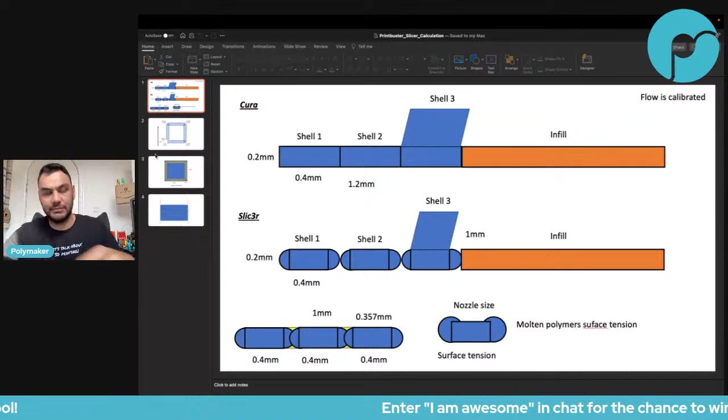Purple and chill combo looks way too good together, so all the printer mods are getting printed in this color combo. Yeah, it's pretty good. Dark and light is the most beautiful - dark for the main color, light for the accent. That combo cannot go wrong.

Okay, let's get into that again. We do have some more information coming from our Discord. I think NSCHO, FDAF Patch, and Zombie, if I remember well, are the names I've seen really trying to understand a bit deeper on flow calibration.

Where is the cotton candy filament? Like I said last time, I believe our pastel color in the Polyterra is pretty cotton candy. Otherwise, you see all my cute dragons here? Can you see them well? I printed them - it takes 2 hours to print one, but look how beautiful they are.

Look at that, look at these colors. They're so beautiful. Aren't they cute? Beautiful green. This is our light blue. This is our teal. It's just so beautiful.

We have the Sislov red that is printing. Maybe we're gonna call it Brit red - then we won't have an issue with the Sis Lord.

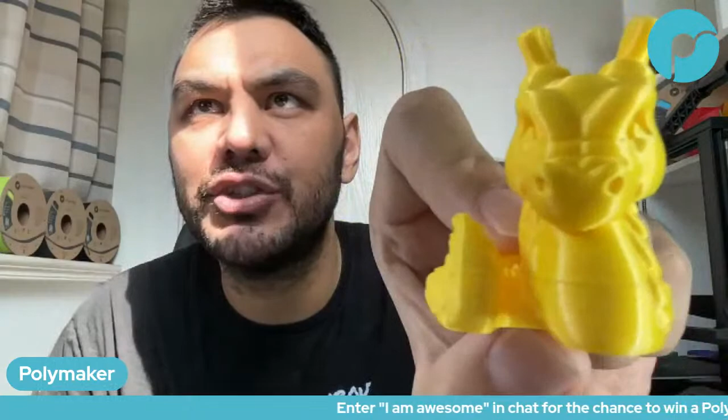So there is a line that we can try to discuss - why there is a line after power recovery. Give me your hypothesis: why, if you have power recovery and you're following exactly the same G-code, would you have a line that goes all the way? It seems it's not even a layer shift, right? It's really, for some reason, 2 layers that extruded more than the others.

But anyway, my favorite color is, of course, the teal. We're finally gonna have a Polymaker Silk teal. Of course the light blue is not far behind, and the green - well, I love all of them. Let me put them back. We're gonna have around 20 silk colors. They're so beautiful.

When the red finishes I'll show you - it's also beautiful. Please take a screenshot and show that to Sislov Brit, because I'm gonna call that red, most likely, Brit red. I unfortunately can't use the Sis Lord name, but it's printing right now and I'll show you, and then we'll print the orange. It should be finished in an hour or so, so during the stream it will finish.

I explained that months ago. Oh really, FDAF Patch? You mean why the power recovery leaves that line? Brit red, exactly - I think there's 2 T's if I remember well, I have to check the spelling of Brit.

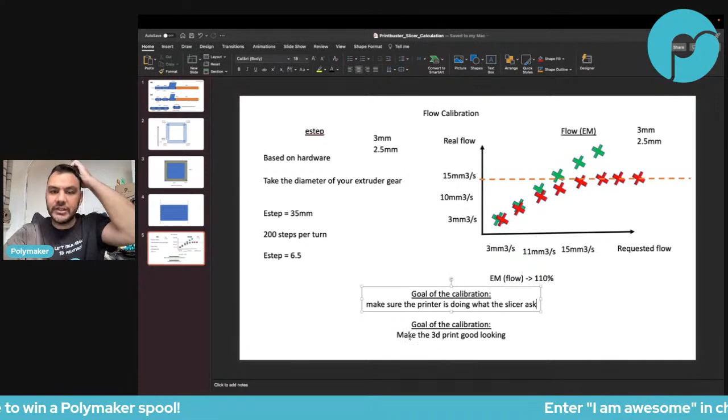That's the goal of this calibration. There's another goal of calibration we can discuss later, which is making the 3D print good looking - that's a different type of calibration. The calibration I'm talking about here is making sure the printer is doing what the slicer asks. If the slicer asks for this amount to be extruded, you have to extrude that amount - not over extrude, not under extrude. The other goal, making the print look good, is different - you print some parts and make sure they look good, whatever the extrusion amount, we don't care.

So let's start the feedback. Let me know what you think about this calibration. Is this the perfect calibration? Is this how we should always calibrate the printer? I've seen a lot of different kinds of calibration, but I want to find the one that does this the best.

FDAF patch - it's true, retraction doesn't take into account extrusion multiplier or the flow. I just tested it. Thank you, FDAF patch. Then we don't have to test that.

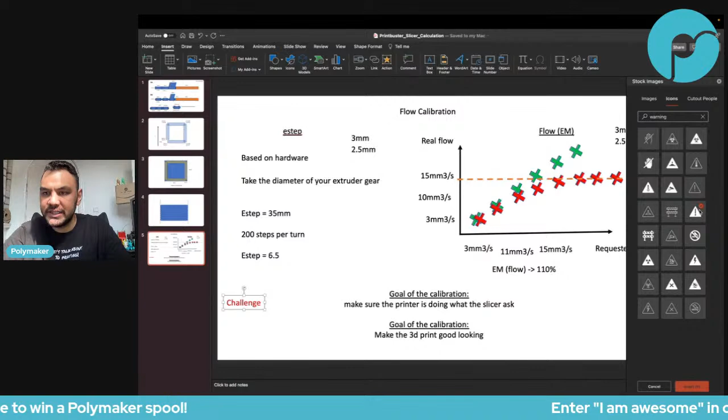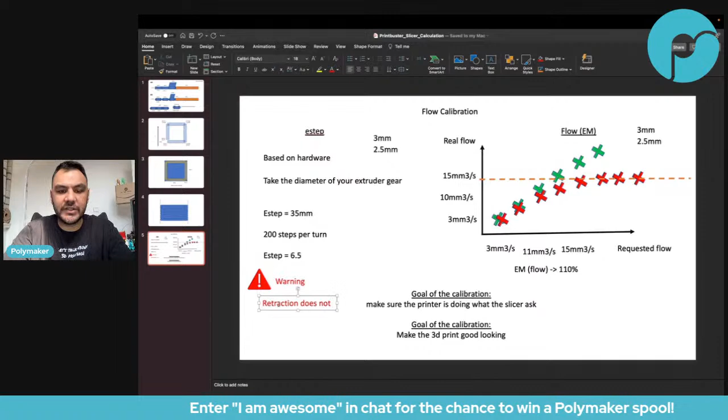So there's a challenge here we need to take into consideration, or maybe a warning. Let's put a small warning sign here - warning, and I don't know if there's other stuff that's not taking the extrusion multiplier into consideration, but retraction does not take extrusion multiplier into consideration. That's important information, because if it doesn't, it means the printer is not going to do what the slicer asks.

Let me stop talking a little bit - oh, Zombie, let me know. Zombie wants to come in. Let's invite Zombie, what does he want to say? Let's welcome Zombie - I like how Zombie just says hey, let me in, let me talk a little bit, let me get some stuff clarified. Where are you going like this - you miss this, you miss this, you miss this. Let's see what Zombie has to say. Okay Zombie, I just sent you the link on Discord. Be prepared, I'm going to be scolded by Zombie.

Doesn't work if you have minimum layer time, as this will reduce the flow for small layers. Yeah, exactly. Actually, we should put a warning here: the slicer does not optimize extrusion multiplier per flow rate, because theoretically each flow rate should have its own extrusion multiplier, but the slicer only has one extrusion multiplier for everything. So that's the second warning - that's a good point.

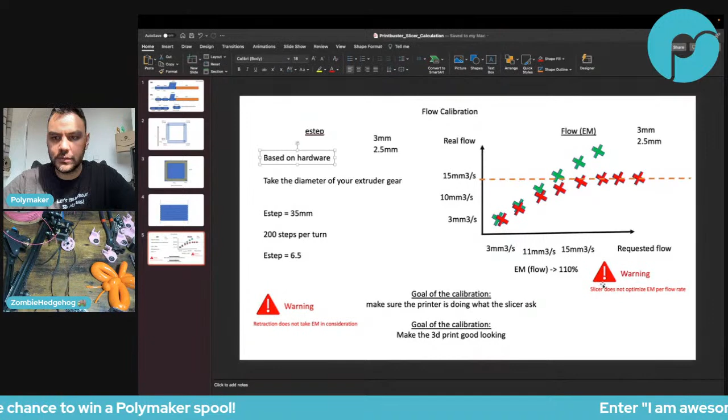So I have to do more tests on this, and I'm going to start doing them live to see if maybe changing the setup would affect something. I don't know. But what was the extruder on that one? This is the Ender 3 Pro, so this is the stock Creality extruder.

Why adjust tension when it's set? Okay, let me put a small star here. So Little John, you shouldn't need to adjust the tension, but the idea is that we have to test how much the flow is affected by changing the tension.

Why adjust the tension once it's set? Is this an Ender thing? Not really. I think you can have a set tension, but what Zombie is saying is the tension will be part of the factor when you adjust the flow. For me, the e-step is only based on the gear diameter. One warning though - unfortunately if you do that, the retraction won't really follow what the slicer is doing, and then you'll have to compensate all other factors with the flow.

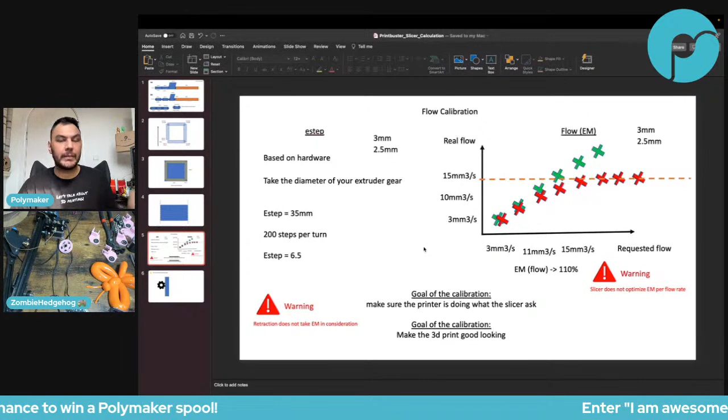Okay, so my theory is that if you calibrate for one filament, the end result, the end flow, is going to be similar enough between different filaments that you might not notice in the final result. Because the difference when you do a test for, let's say, 100% to 90% flow for the surface layer, there's not a lot of difference, so you might not notice if it's over-extruding or under-extruding as much.

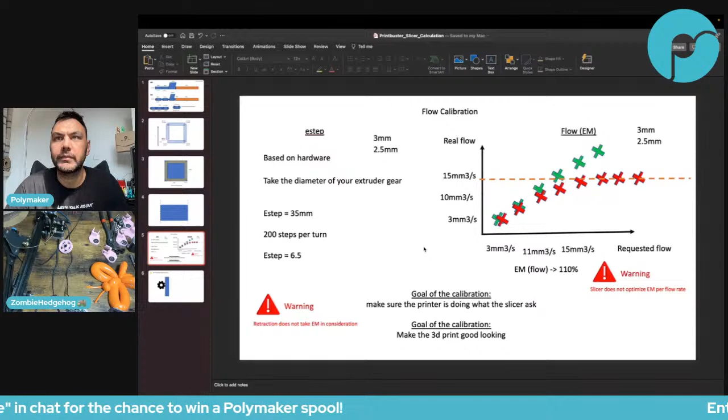So you're saying they use the filament because anyway there's not much difference between different filaments? That's my theory—there probably is a difference, and that's what I want to test, to see if my theory is correct. I'm trying to replicate my results, essentially, to see if it was a setup issue.

Yeah, this is interesting. But so, why is it different today? The E-step calibration this way is much easier to do, right? You just have to take the diameter of your gear. Why would they make it more complicated? What's the advantage of using the filament?

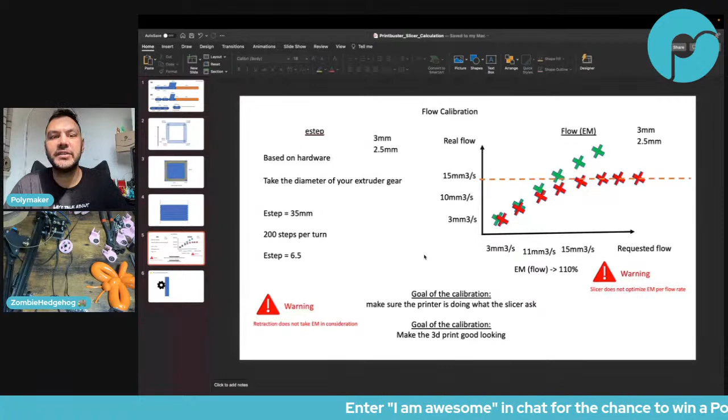Some are using with nozzle, some without, some are using retraction, some are priming, extruding one way or the other. What are the advantages of all of this compared to just adjusting the diameter?

Most people, from what I've heard, don't adjust their slicer settings. They use a stock profile, so they don't run any tests. They don't do anything. They just load the filament and print.

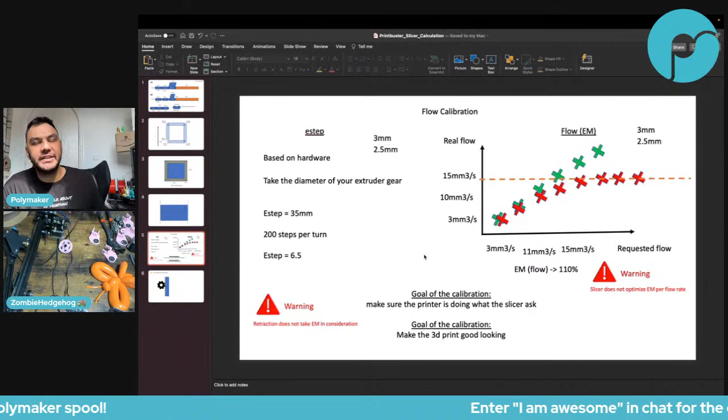So they don't change the slicer setting, but they would change the E-step. Yes, I guess, because everyone says to adjust E-steps, but no one goes through a proper process. There probably are guides for that, but the big one is: if the extrusion's wrong, adjust your E-steps.

The main thing I disagree with in E-step calibration is that most E-step calibration guides, whether video or written, do the calibration the same way they do flow. They put the filament in at the manufacturer temperature, calibrate your E-step, and then they want you to also change the flow. What I disagree with is if you go through all of this with the E-step, through the nozzle etc., then there's no point doing the flow calibration, right?

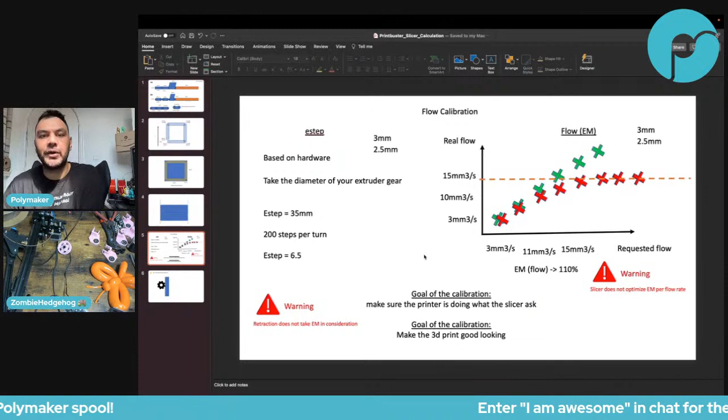Exactly, that was the beginning of these Printbusters discussions. Do you remember Nero saying that even if you do the E-step calibration this way, you still have to calibrate your flow for some reason, because of expansion or something? If you remember that topic.

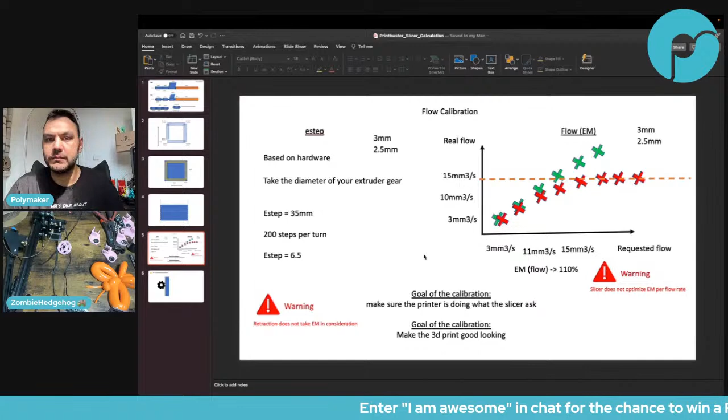Yeah, it'd be good to do a lot of testing, or try to find people who've already tested this stuff, and do internal testing with different setups. From the testing I did yesterday, which I want to retest and am doing now, I'm finding the results are similar. I might not be extruding long enough to see a difference, but I'll check my settings in a second.

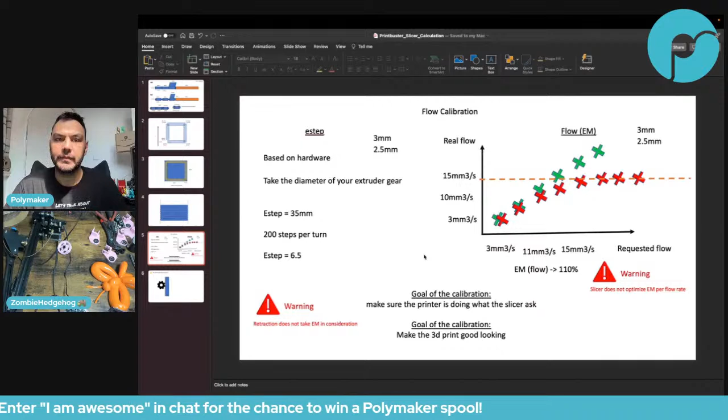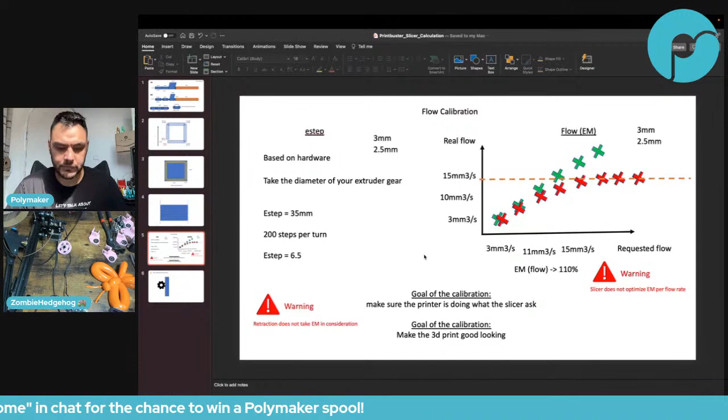Based on what I did yesterday, and chat kind of sanity checked me, even if there's a little difference in extrusion distance based on filament type or tensioning, that doesn't completely negate hardware E-steps calibration. So I think I need to check this, but I'm getting actually similar results.

Okay, no, that one was different. Good, I need to go longer then to amplify the results. But essentially, these are the two test pieces. This isn't crazy scientific, but of course there's a delay.

Let me go to StreamYards, or just the camera. So these are two tests, and this is the amount of filament left after extruding - this is the difference between just adjusting the tension, all other factors the same.

Okay, so the one where it left the most was the more tension one - more tension, more under extrusion. And that was kind of what we were finding yesterday.

Okay, let me read a little bit. How much are you extruding each time? For this test I'm only doing 150 millimeters. I should probably go further - I was doing, I think, like 250 yesterday.

CRS1, thank you for being awesome. Matt says: I think E-step matters to calibrate the printer to a set point. If I have multiple Ender 3 printers, I want them to have the same E-step calibration so my profile works the same on each printer. For material calibration, I adjust the flow setting.

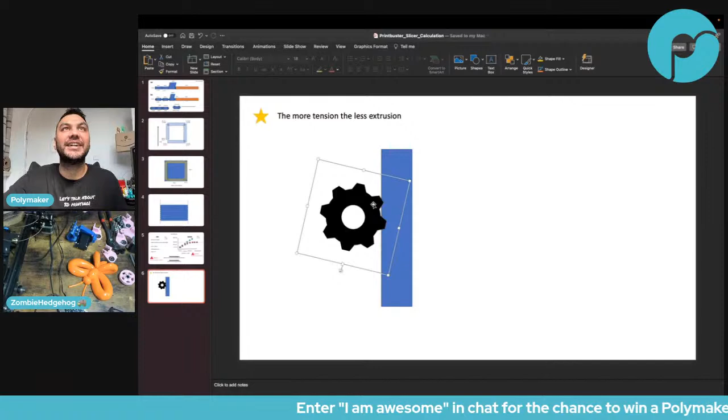Well, Twitch is bad, but at the same time, I have 90% of the people from Twitch and nobody from YouTube. So, just kidding, Gold. I mean, not kidding, that's the real numbers.

But I do agree with the YouTube chat or the Twitch chat. Did you post the Discord link in the YouTube chat or the Twitch chat? Both. Oh, okay. Otherwise I have to select, blah blah blah, so I just put it in. Oh, okay.

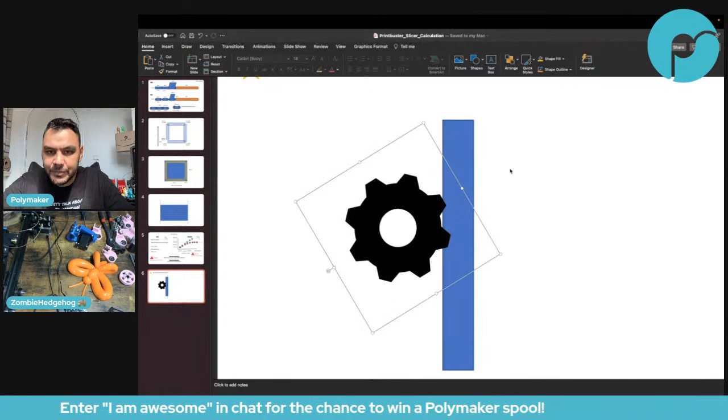Yeah, I do agree with the fact that the gear is going to dig into the filament, which is going to deform the filament. And if you have more tension, it's going to deform it a lot. From Zombie's test, this deformation is going to somehow reduce the amount of filament that's pushed in. It could come from the fact that when the gear is arriving and starting to dig in like this, maybe at the beginning it's going to create some force upward, and then it's going to dig so much, and then it's going to start to extrude. So maybe that could be an explanation.

But again, I only have this hypothesis because I already know the result at the end, so it's a bit biased. I'd have to think more about how to explain that the more tension, the less extrusion. But again, I don't believe that as you're digging in more, you reduce what you call the effective diameter, and so the calculation is different - I don't believe in that, because of the tip of the filament, because the gear is going to go the same speed anyway, and the tip of the gear is the same. If it would be the whole gear that somehow shrinks, then yes, you'd have to redo that gear ratio calculation. But digging into the filament, I think there's some other physics happening, not that calculation.

The effective diameter is called diametral pitch, and we found that the closest match to what all manufacturers set as the stock E-step is the diametral pitch, not the outer diameter. Sorry, I don't know what diametral pitch is, let me check. Diametral pitch is the ratio of the number of teeth to the pitch diameter. Face width is the length of the teeth in an axial plane. Oh, okay, cool, we're getting the same results.

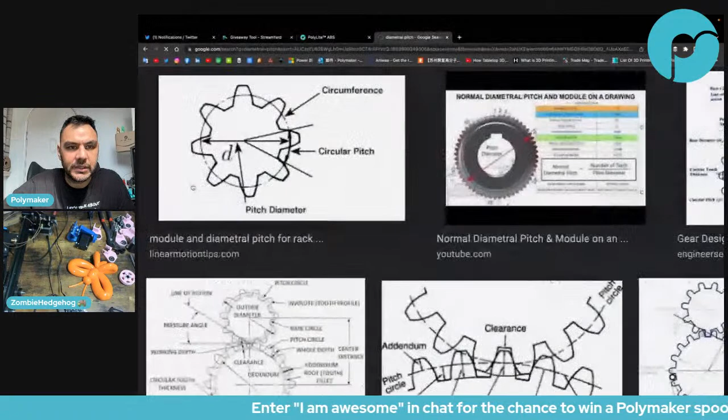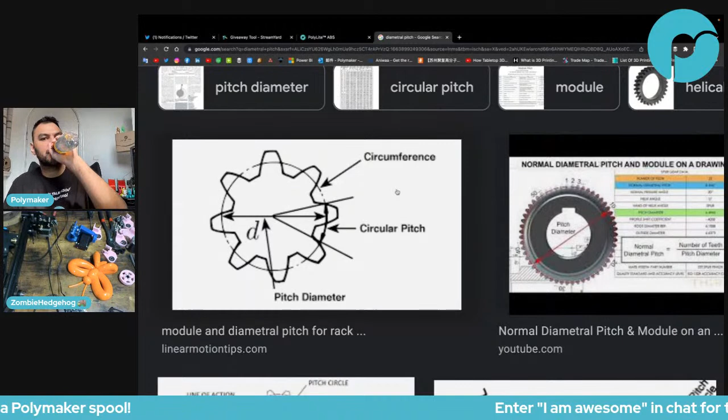Good, I want to test the other filament again. So if you think about how gears work, this is probably the easiest way of explaining it: if they're meshed together really tight, there's a different gear ratio than if they're spread apart but still making contact. I think that principle still applies to the gear driving the filament - the further away the gear is, the more or less contact it's making with the filament, right? Does that make sense? Is that right?

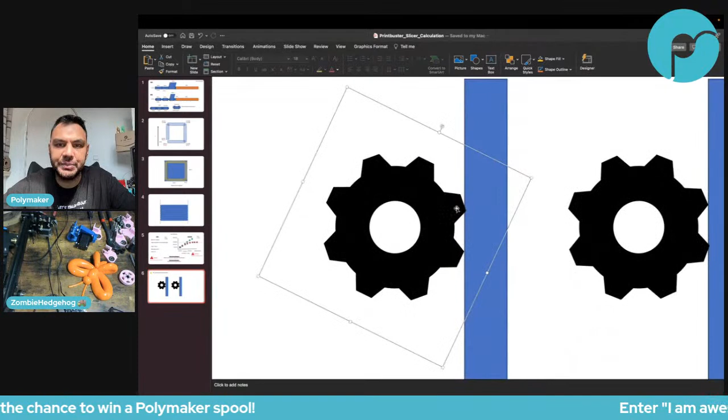Okay, so what we need to explain is, for example, this one is further away, right? Is that right? And then this is going to have a certain speed, like the tip of the filament - well, it's not the tip. The speed is not defined by the tip of the filament, it's the tip of the gear. Or no, yeah, I don't know, I have to think about that for a second.

Because there is a way to explain it. The part I'm trying to understand is why this part of the filament here should theoretically go at a certain speed, right? So it's not. I don't know, and then there will be a distribution here. So is that because of that distribution you have to take an average?

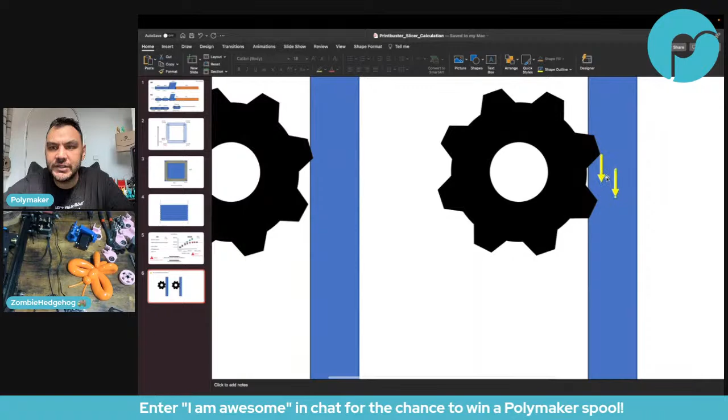So the filament will deform anyway. You see, like here, the filament is just being squished in. I think the actual filament is being compressed. There's no additional speed variation.

Well, actually, that's something to talk about, but I don't know. The more I think about it, the more factors come up, and the more other things make sense. So I'm trying to make sense of it.

So we know that the effective gear ratio is reduced as there's more tension and more digging in. So can someone explain why that's the case? Maybe with an example. And actually my gear is not really representative, right?

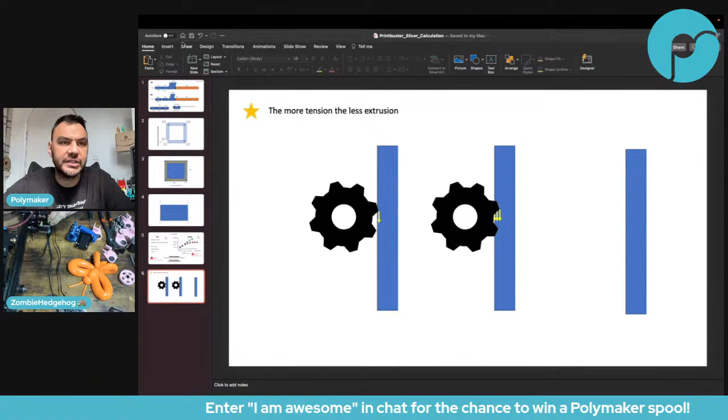The gears in printers are way sharper. So yeah, it's close enough, same concepts, right? But it enhanced the issue. Because if you really dig into that, then you really have the tip here that is pushing much faster than the rest.

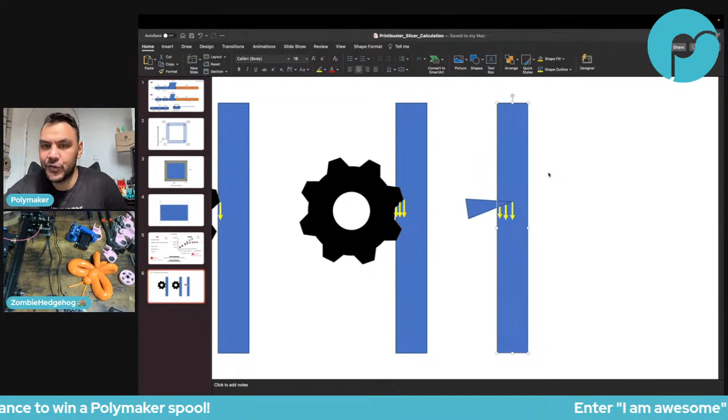So yeah, I'm not too sure what's happening after you dig into that, because definitely when you have a solid that has different amounts of speed within it, that's what Newton's first law, I think, says about the amount of force. But the filament is not staying solid, right? It's deforming, and for me the deformation is what creates this issue.

It's doing something there. This is what Josef was talking about in the 3D Printing Nerd video, where they discussed the XL some time ago. Oh really? They went into that? That'd be good.

Joseph, let's get into that. Did they explain it or did they just say some stuff? 3D Printing Nerd, XL, Prusa. Oh yeah.

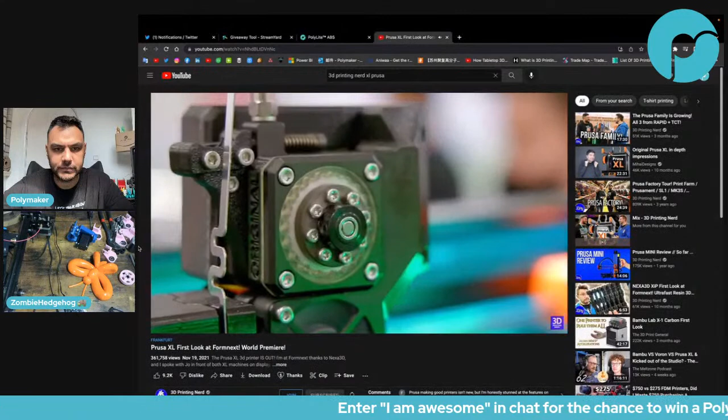Hey, it's Joel. What's behind me here is really cool. We're going to a brand new extruder. Yes, 20-to-1 gear ratio, cycloidal drive, right? Cycloidal. So we really wanted to have a fully integrated extruder. What is this extruder? I've never seen it. That's so cool. See it here on the look. The extruder here, I've never seen it. I didn't know. I know. What is that? I don't know. Cycloidal, like something extruder, glass display. Oh, that's cool. Yeah, and so there is one central milled aluminum.

So is that the video, Little John? That looks about right. Oh, but it sounds like he's abandoned that idea. Okay. Which, they went to planetary. Yeah, a bit later, okay. Let me go a bit later.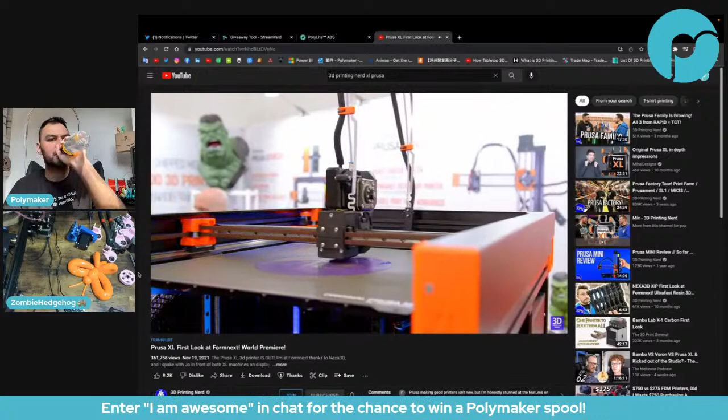The reason for it is to have more surface area touching the filament. Yeah, but you don't have to have two, you can have one large one. And what is nice, when you have larger diameter, for example, on the Bondtech, the filament gets a little bit chewed because on the inside, it moves slower than on the outside in the groove. Oh, I see, so this eliminates that.

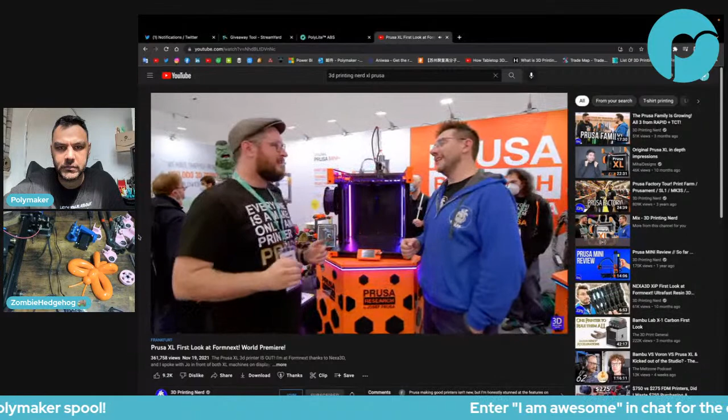Yeah, let's listen to that again. Gets a little bit chewed because on the inside, it moves slower than on the outside in the groove. Oh, I see, so this eliminates that. Yeah, so it is much more consistent. Sometimes they didn't go too much into detail, but let's try to listen to that again. On the Bondtech, the filament gets a little bit chewed because in, okay. A really big one. And you have two of the bearings that you push against, right?

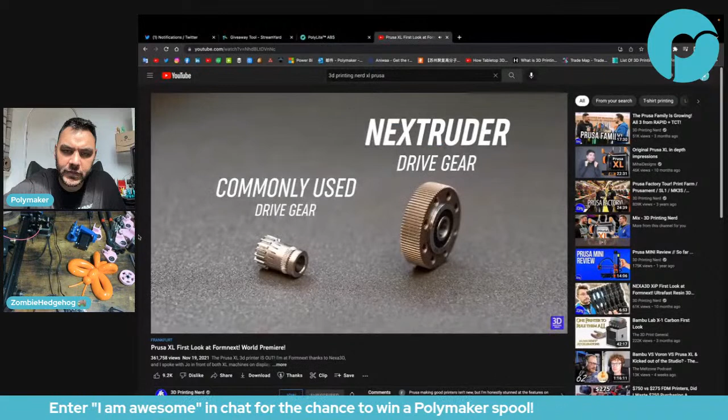Yes. So FDIP Hatch says this happens because filament is ductile and is being displaced by the tooth into the holes between each one, making it act like a wheel that can change the diameter by a little bit. Yeah, that's what I was trying to think of.

Let me try to draw up something on Paint. I don't use the good PowerPoint software. The tooth goes into the hole between each one, making it act like a wheel that can change diameter by a little bit.

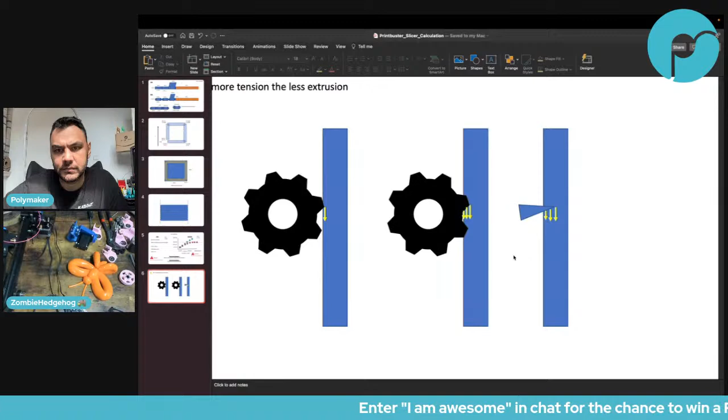So this is the same theory as the extruder lines you get on prints. The fact that the extruder digs into the filament a little changes the speed, and that speed is reflected in different amounts of extrusion, which you can see on the actual print. So if you have too much tension, the teeth dig into the filament and change it as it's going. But I'm not 100% sure on the mechanics of that.

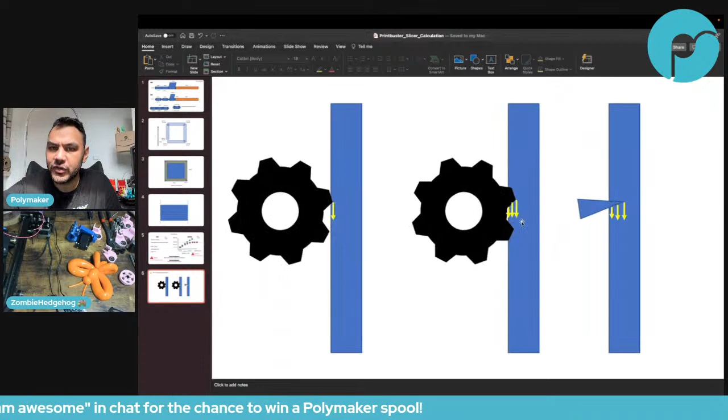I don't know why. I still didn't get it so much, why digging into the filament is going to lower the speed or extrude less. The only thing I can see is that when the gear is about to dig, from that point to that point it's actually pushing filament out of the way, or something like this. I don't know.

I have a clog. I have a clogged tube. I have a clogged nozzle. It is what I said for a couple of minutes. What did you say?

Dual drive gear. Sorry, let me just listen to that one more time because I still didn't understand what he said. Of the bearings that you push against, right? Yes, basically dual drive gear. The reason for it is to have more surface area touching the filament.

But you don't have to have two, you can have one large one. And what's nice with a larger diameter, for example on the Bondtech, is that the filament gets a little chewed because on the inside it moves slower than on the outside in the groove. Oh I see, so this eliminates that.

So I don't think he explained it, but I have something in my mind which I think is what he meant. He's talking about a larger gear solving that problem. Here's my hypothesis. When you have a small gear, let me put that out of the way. So let's say this is the small gear.

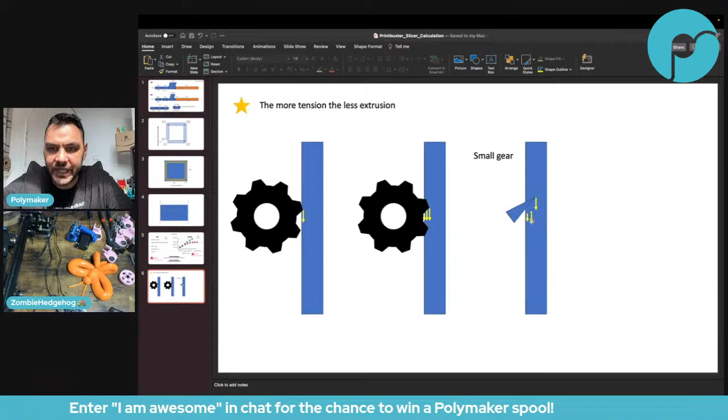Here's a thing, very logical in my mind, let me share with you. So when you have a small gear, the angle of attack, if we can call it that, is going to be very sharp. And there's going to be a large difference between the tip of the gear and the bottom of the gear, okay?

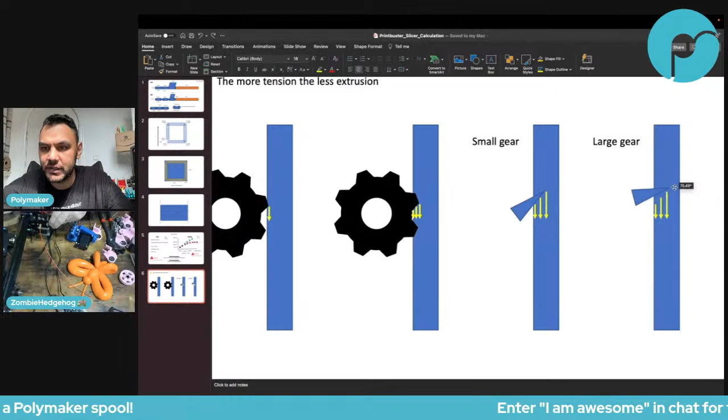But that, I still don't know why, creates some problem — the fact that you completely deform the filament. But if you have a large gear, the angle of attack is much less. It's able to get more grip on the filament by making more surface area contact with it, versus a smaller area needing more grip.

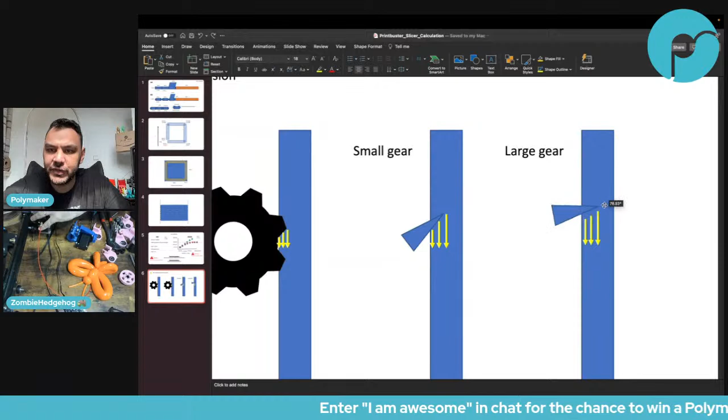That's why I think large gear extruders are the way to go. They're definitely optimal, this kind of explains that. So you should hypothetically get fewer artifacts on your prints via large gear extruders. Well, let me think. So the angle of attack is going to be more like this. Yeah, so it's going to deform less, more evenly push the filament with a large gear, because it's going to arrive like this.

Well, we know that already, that's already a fact. What we're trying to figure out is we know the result, but I don't think we know the explanation. We don't know why large gears are better than small gears. Because the teeth dig in less. Yeah, but then we don't know why digging less is better. So that's the main question: why does the flow vary by the teeth digging in more?

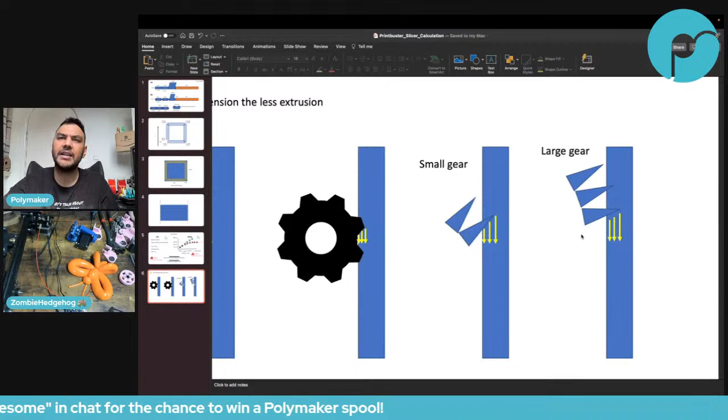I don't think it's about digging less. I don't think the large gear is better because it digs less, that's not what I'm saying. What I'm saying is the angle of attack is different. So you have less of a difference between the tip of the gear and the middle of the gear compared to the angle of attack of a small gear.

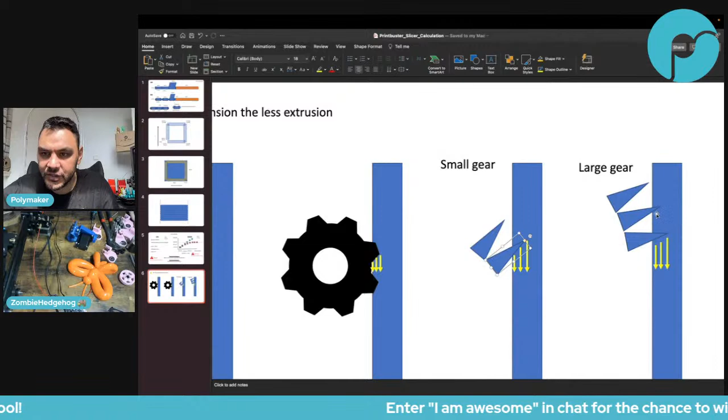So yeah, it's a bit hard.

Just bought a roll of Silk Silver and Silk Magenta on Amazon before the Lightning sale ended. Excited to try them. Yeah, great, Jared, great that you were able to take advantage of the deal.

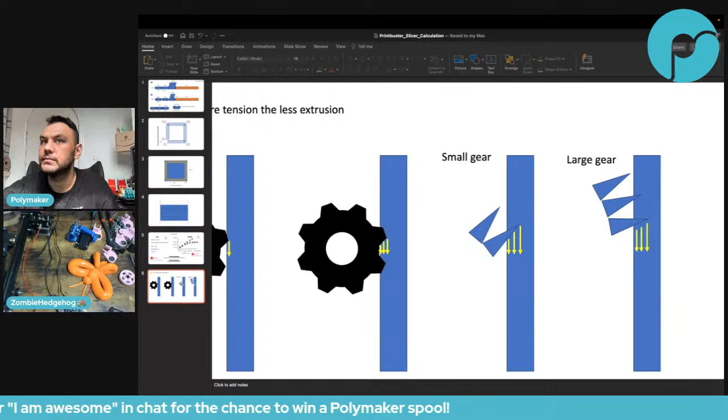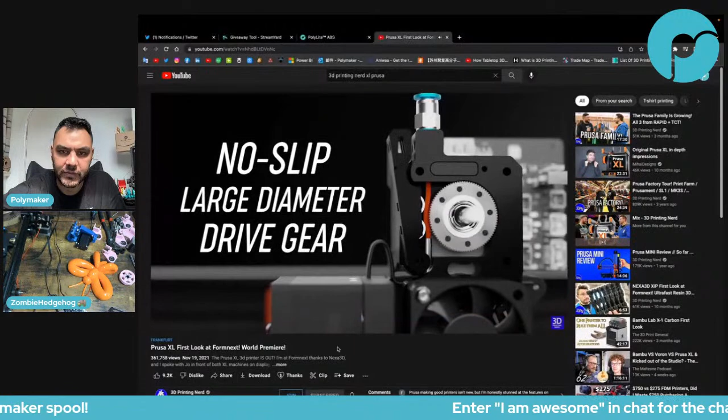Because that's what he's saying. What he's saying in the video is that larger gear... well, let's listen to that again. We have to listen because he's going very quick. Two of the bearings that you push against, right? Yes, basically a dual drive gear.

The reason for it is to have more surface area touching the filament. But you don't have to have two, you can have one large one. And what's nice, when you have a larger diameter, for example on the Bondtech, is that now he's going to explain why it's better to have a larger diameter.

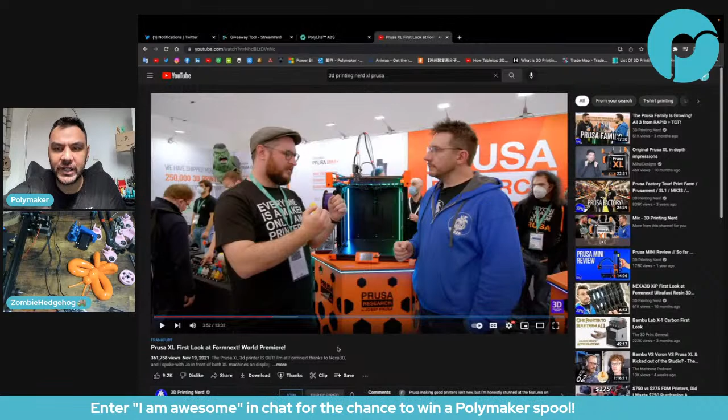The filament gets a little bit chewed because on the inside it moves slower than on the outside. Okay, so inside it moves slower than the outside - that's what we explain here, right? The inside here, the filament is being pushed slower than the outside here, in the groove. Oh, I see.

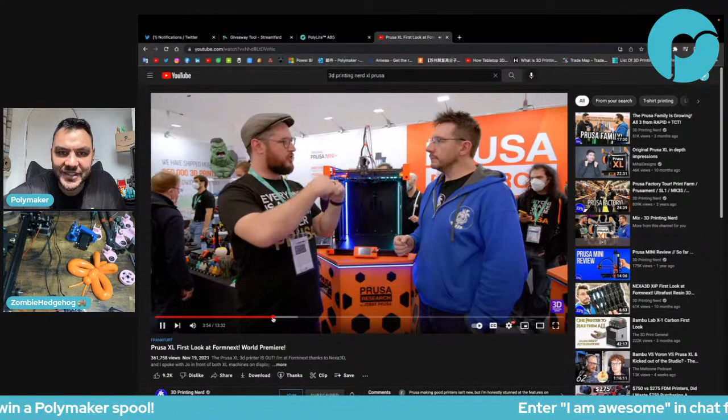But the problem is, I don't know how Joel understood just with this - a little bit chewed because on the inside it moves slower than on the outside in the groove. Oh, I see, so this eliminates that. Yeah, I don't know, eliminate... I don't understand, but anyway, I guess that's what Little John was referring to.

Bigger gears mean less speed difference between the tip and bottom of it. It also has more teeth in contact at the same time, so it digs in less, like a bed of nails effect. This one I agree with - I agree with the first one and I agree with the second one. What I'm saying is it's better just because of the first one, because digging less... well, digging less means less speed difference also. Yeah, that makes sense. I 100% agree with that.

Ask Joel about it - yeah, I mean Joel is more focused on general presentation for the public about printers. I'm not sure he's particularly interested in that amount of detail. Joel's not the person to ask for this. You'd want one of the manufacturers of printers, or a hardware person, or someone who does a lot of testing - but not just anyone, because they'd have had to test this particular thing. So honestly, go ask Bondtech if they're going to be there, go ask an actual manufacturer of extruders.

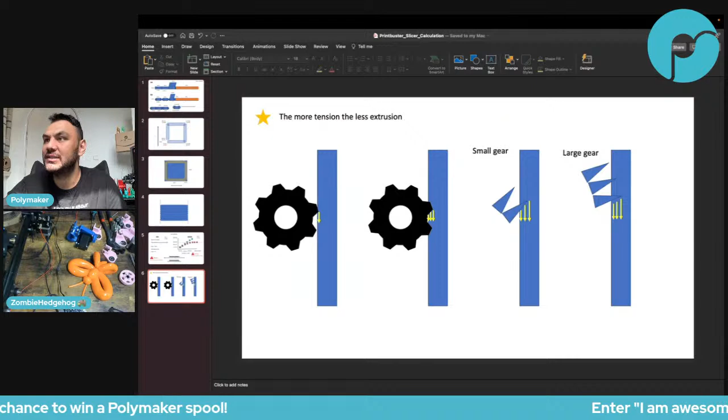Some finite element analysis looking at filament deformation might be useful. Yeah, that would be awesome, Little John. That would be awesome if we could have this, it would explain everything so much easier. I don't know if any of you have access to this type of software and know how to set that up. Oh, I think I actually know someone. That would be awesome if we can do that - that would be a great white paper right there.

Here's the actual question, and now that I'm looking at this a little more I'm starting to see. I'm guessing that the speed of the filament is dependent on - we'll go back to that, go back to the image. Oh sorry, I need to restart my print at the same time. What was that? Okay yeah, you have it back up. So I'm thinking that the edge of the filament versus the speed or contact of the gear, that's what defines the print speed.

So as the filament gear digs more and more in, it becomes slower, the extrusion becomes slower. Does that make sense? Yeah, because it will start to have internal stress of having the tip of the gear very far, pushing the filament fast, and the more you dig in, the more you'll have part of the material pushed slower, and it will start to create stress, lowering the overall speed. Yeah, that makes a lot of sense. You take the average. Come again?

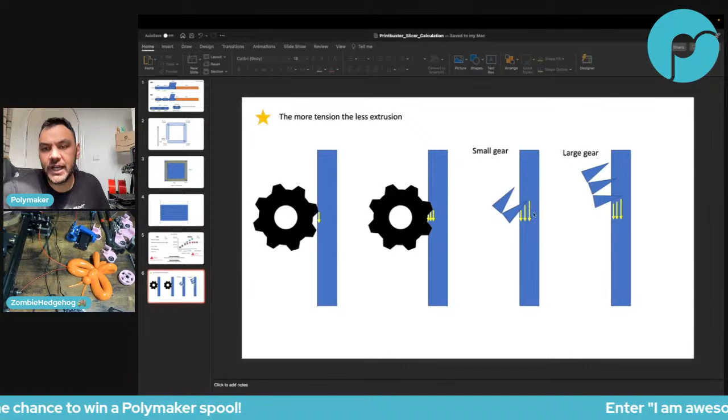But there has to be some stress, right? Because otherwise... well, yeah, okay, there's stress, but how does that work? What causes what? Oh man.

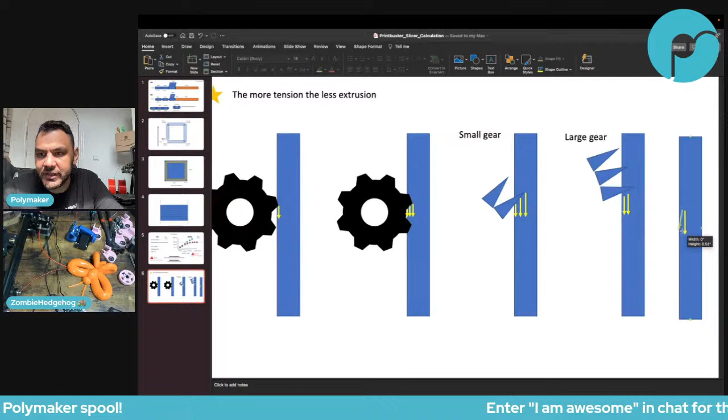Basically it's like this: you have the filament here, and if you only have the tip of the gear that digs in, then you only have a small amount of set speed. So you do an average between two speeds. I don't know exactly how the filament will react, but maybe we can just take an average of this speed, and that would give the average speed of the filament. The more you dig in, the slower the speed gets, like the effective diameter they were talking about.

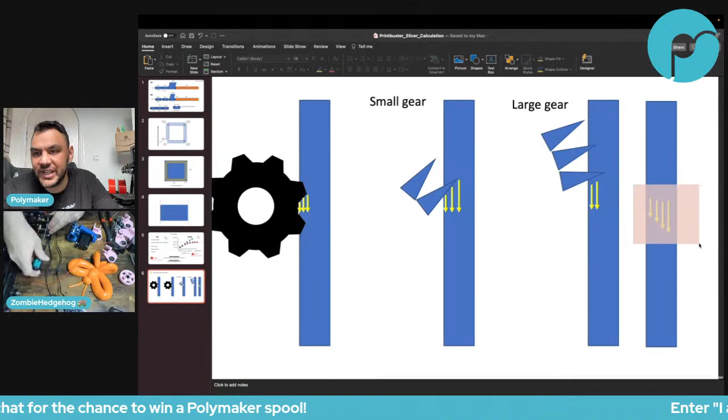Now the idea is, do we take just an average, and then the filament will kind of deform? Like here it will be compressed, and here it will crack, basically.

So create some grooves or something. Okay, so when is the filament moving fastest? Is it when the tip of the gear is engaged, or when it's dug in quite a bit? Just when the tip of the gear digs in, that will go very fast, because it only takes the fast part of the gear. But when it digs too much, you have the fast part plus the slow part, and maybe there's some kind of average.

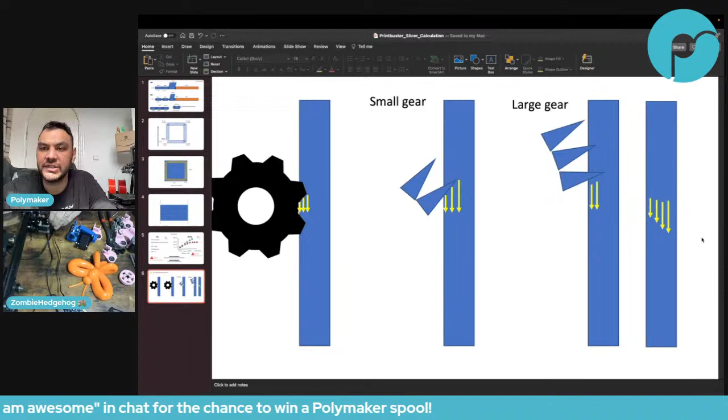Right. The speed of the filament is the average of all the contact areas. So you're saying that the more the gear digs in, the slower the filament is going to travel. Yeah, the average will go slower and slower as it digs in. That would be my hypothesis.

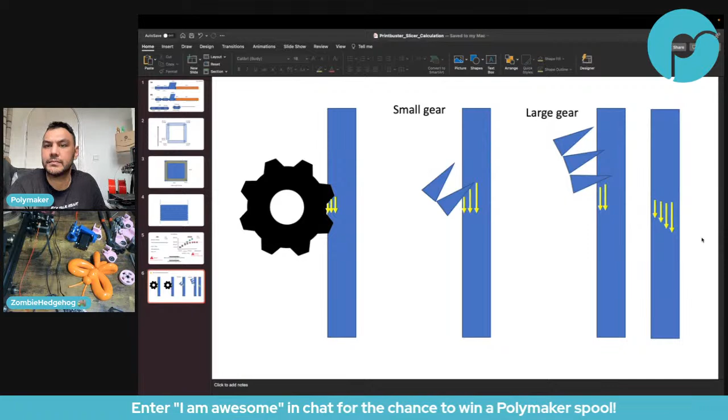Okay, so what if that immediately corresponds to the testing that I'm doing? The more extruder tension, the less filament you get out because it digs in more. Yeah, that could be 100% a hypothesis that adds up, because the effective gear ratio is changing.

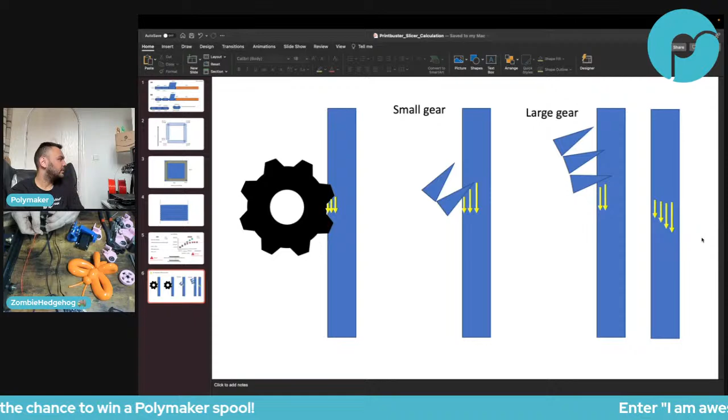Yeah, I think I understand now. Oh, sorry, I understand now. I mean, the chat was way ahead of me on that, but I think I start to get some understanding. Kevin, that's exactly the test I'm doing right now. I'm literally doing that test as we speak. So now the question is, if you use...

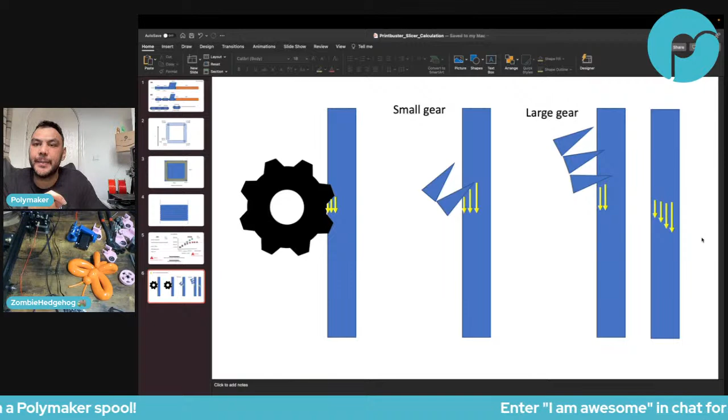Oh, so here's why I think stress is important: because TPU, for example, might not handle this speed difference as well as a rigid filament would. I'm testing that as we speak.

Because my thinking is that the rigid filament, you can take an average of, because it's intrinsically condensed, or how to say that, like rigid basically. But I'm thinking the TPU... let me see. Well the TPU is a different story, because I think the gear cannot dig in. So if it cannot dig in, it will slip, and then less filament comes out.

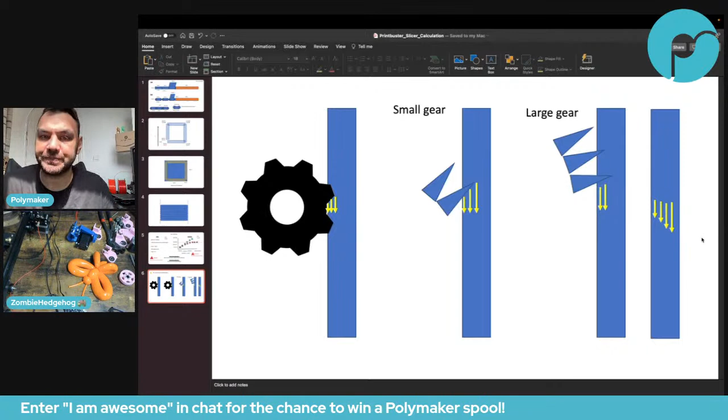So there you go, my hypothesis is the following: if you're testing TPU filament with a gear that's not very sharp, like just a regular gear, it's not really going to dig into the filament. If you take a rigid filament outside after it passed the gear, you can see some small grooves. But with TPU, usually you cannot see grooves because it didn't dig in. So my hypothesis, if it doesn't dig in, is that the speed is going to correlate with the friction between the gear and the filament.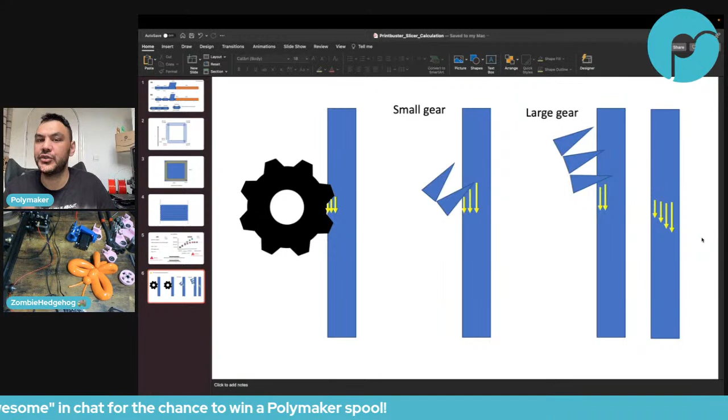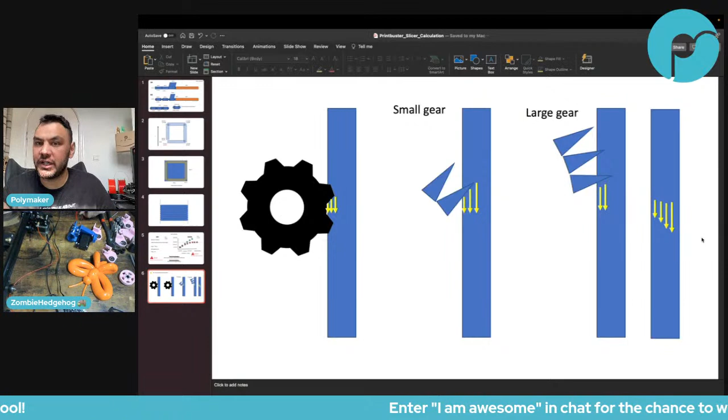The more friction, the more you can extrude, and the less friction, the more slippage. So my hypothesis is that if you don't tension a lot, the friction will be lower, so you'll extrude less because of a tiny bit more slippage. Then if you increase the tension, again assuming it doesn't dig in, the friction should be higher, so it should extrude more. That's my hypothesis, let's see the result.

So for more tension, is it going to extrude more or less? More, my hypothesis is more tension, more extrusion. Nope.

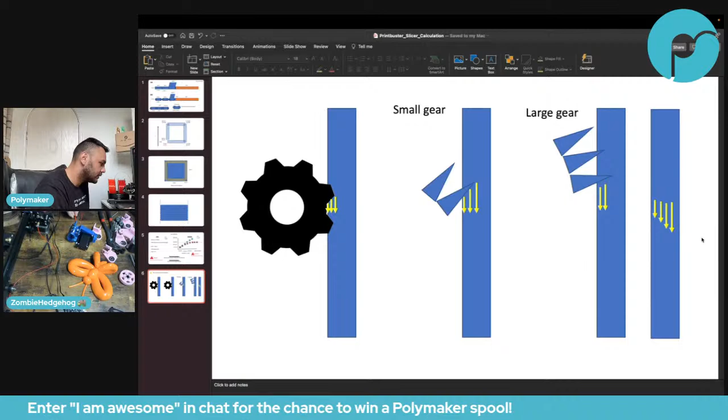So wait, sorry, I have a glitch on my printer. It just completely stopped, and yeah, it does that sometimes. I cannot read anything on my SD card for some reason.

Autofocus off. Okay, so this is the difference between a 250 millimeter extrusion on TPU. I'm trying to share it on my screen, but the TPU is a little bendy, so there we go. All right.

That's the focusing point, that is the difference. More difference than the rigid filament, right? Yes, so it's the same correlation: more tension equals less filament.

Do you have any groove? Like, what's the groove comparison between the rigid extruded and the TPU extruded? Let me try to see.

Move this beautiful PolySmooth butterfly by Chelsea. Look at that, look at that. It's like, it looks like literally a balloon. Yeah, crazy, it's beautiful, I love that stuff.

Okay, so here, if you can see, I can try to zoom in a bit more too. It's going to be a little blurry, but whatever. So this is the TPU. The longer piece is less tension, and the shorter piece is more tension.

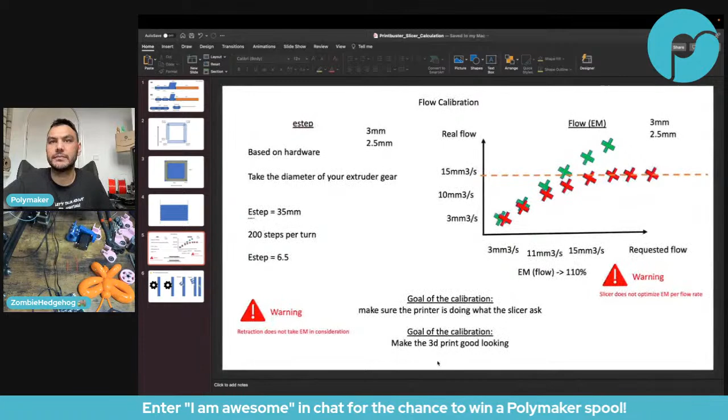But the flow calibration discussion could be closed now, whether or not I'm sharing the PPT anymore. Just because with the same extruder tension we're getting this much variation in filament length per extrusion, I am 100% full software calibration. E-steps does not matter at all, 100%. For me, why I like this idea of hardware for E-step and software for flow is because there are so many things that can affect the flow, that I would give all of this to the software and only keep a few things for E-step, just the gear geometry, the gear diameter, the gear size.

NH2 did a test with a hot end. What did you find? I'm sorry, I saw that you did a couple of tests, but I don't remember the conclusion. So what conclusion did you have?

Where did NSO post it? All of this, I can't remember if it was in my... I guess my channel is now the flow calibration one. I was thinking why this discussion went here. I guess all of my viewers are very scientific, so we do all the science talks on my channel.

Okay, last chart: real path width, hot end, error percentage, looseness of tension screw. Okay, so I guess that's the graph NHO wanted to show. On the left is a very loose tension, and on the right is a very tight tension, right? Looseness, or the opposite? Left is tighter. Oh okay, so the tighter...

What factors influence flow, in which way it influences, and why it influences. I think there's a lot of great topics on that. And I actually have a conclusion to this whole testing too at the end.

My PLA is a hard and stiff one, so it's not affected by tension so much. That's my hypothesis. What material property affects the squish factor, like how much the gear is able to push in? PLA Pro is harder. Hardness, I think that's the property.

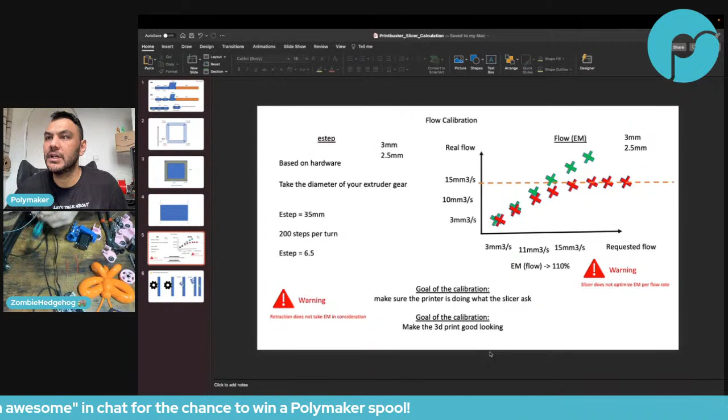That's not something you guys test though, right? We do have shore hardness for TPUs, and we also have shore hardness for our rigid materials. Oh, you do? It's not on the website. Yeah, maybe, I should add this as well, if it's not on there, because I was trying to look for that.

It's the same idea. You indent with a small needle, and depending on the pressure it requires, it will give the shore hardness. Melt index, I'm not too sure, maybe not. I'd lean more towards shore hardness, like how hard the filament is. How does it resist the gear digging in?

There might be something related to Young's modulus as well, because of the elastic deformation it can take. So I think Young's modulus and shore hardness should be the two properties that define how it will behave.

You press with a pyramidal indenter. Yeah, just the regular shore hardness test. They said Young's modulus, okay, so let me pull that up for the materials I'm testing.

So I have PolyTerra, I have PLA Pro. PLA will have the highest Young's modulus, and PolyTerra will have the lowest out of the PLA. I have an ABS - is this ABS or ASA? ABS would also be a bit lower. ASA, yeah, and then TPU 95.

Young's modulus being the amount of deformation compared to the amount of stress. So the lower the Young's modulus, the more they will deform under a small amount of stress - you can see the gear is the stress and the deformation is the groove digging in. That sort of corresponds. So in this test I just did, not extremely scientific, only one test, but...

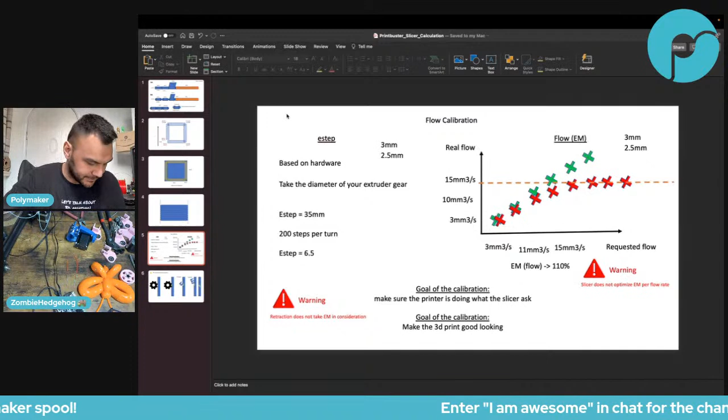If the extruder slips, of course under extrusion can be solved with tension. If it does not slip, it can't be.

Yeah, Sebastian, yes, I agree. I love the dual host show. Yeah, I also like it. Sounds fantastic. Yeah, Paisley's.

How much awesomeness comes in a roll? Ooh, a lot. I calculated it around 3 to 4,000 awesomeness.

And it's true, the weird thing is generally people use lower extrusion multiplier on PolyTerra and ABS to get good results. But that is the opposite to our experiment, because these softer materials should be extruded less under the same setting. Yeah, and it's true.

I agree, and that's going to be the awesome thing, right? The awesome thing is when you try to correlate theory and experiment, because that's what I like with Printbusters. In most discussions in 3D printing it's all about experiment and not that much about theory. What I like about Printbusters is we really try to correlate theory and experiment, which is very hard. It's very, very hard, but that's the nice part of it.

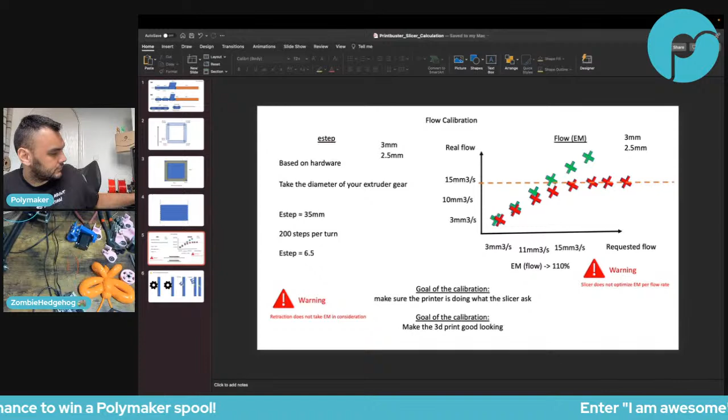Now I know that if I request 100 millimeters of filament on either system, it's going to give me the same result. So then I can use the same profile in my slicer. And hopefully the variation between the filaments is the same between the different extruders, or close enough that I can just use the same extrusion multiplier in the slicer for all of my printers.

But you have to calibrate your extrusion multiplier anyway, right? Because all your printers, I guess, have different hot ends, and maybe you print at different settings. That's the question. Does that matter? That's the question, right? Is this variation going to directly correspond into differences when you attach a hot end?

So we're going to need more testing, but my current conclusion is: with a hot end, doing it as you would typically, you set your hot end to its typical operating temperature for that filament. So you use the same temperature for every printer and the same filament for every printer, extrude the same amount, and do the same exact test on every printer, and then use that for your E-steps. The E-steps value in general does not matter, because you're just going to account for that in the slicer.

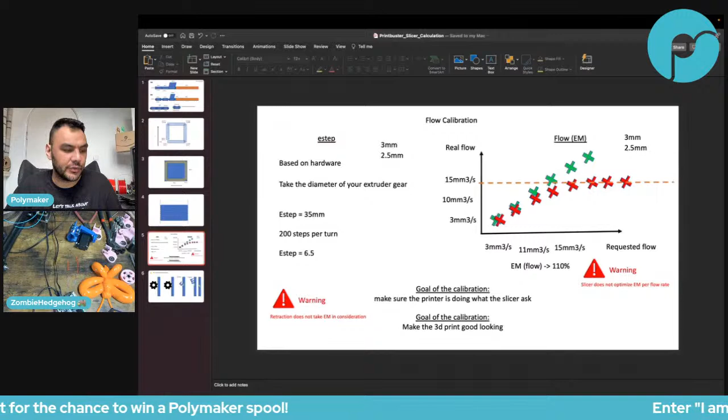Okay, so does that mean you don't calibrate your flow after that on your different printers? Just on the different printers? No. So I would take my one printer, let's say I have 10 with all different hot ends and extruders.

My theory is that you can adjust the E-steps once on one printer and take that printer and then calibrate the flow with like a swatch truck, and then save that value and use that for all additional printers that you only need to adjust the E-steps on.

I'm guessing it'll be similar. So you calibrate the E-step on a printer using PLA Pro, and then you calibrate your flow. So why do you calibrate the flow after calibrating your E-step?

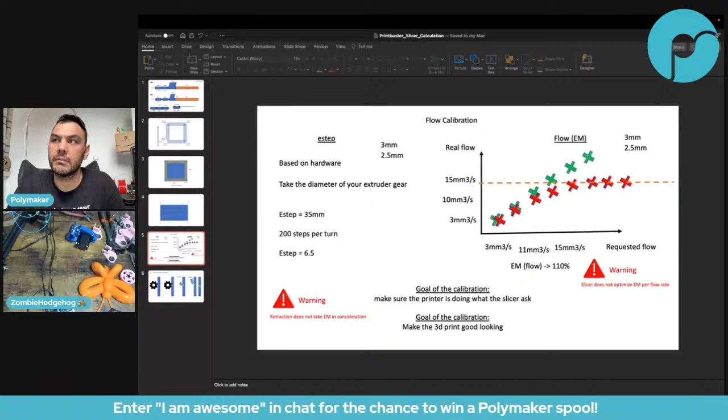Because there's different variations in filament. There's different extrusion based off of different filaments. And that's a good point. I think I have to retest this. So much stuff to test, right?

In Cura, Cura has given me the most consistent results in actual versus requested flow. So if I calibrate my E-steps with a filament and then go into Cura and test a model, the flow is almost correct for that filament. But I haven't used Cura a lot.

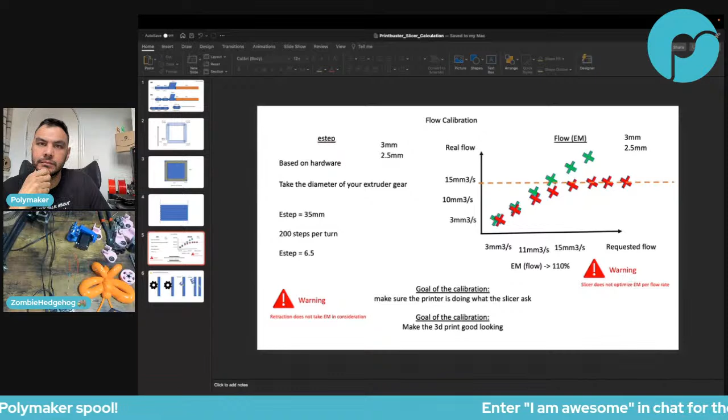In Super Slicer, they purposefully over extrude by the way that they calculate. We figured that out last time. So most extrusion multipliers are 92% and whatever. So that's not saying that 92% of the filament is coming out or whatever, but...

This is by visual inspection, because a thin wall test is not accurate enough. That's been proven. There's too much variation between the layers, and in the same sense, an overall 20 millimeter cube test, there's too much variation, layer shifts, minor layer shifts, for it to be valid. The most accurate is, if the goal of the calibration is to make sure the printer is doing what the slicer asks...

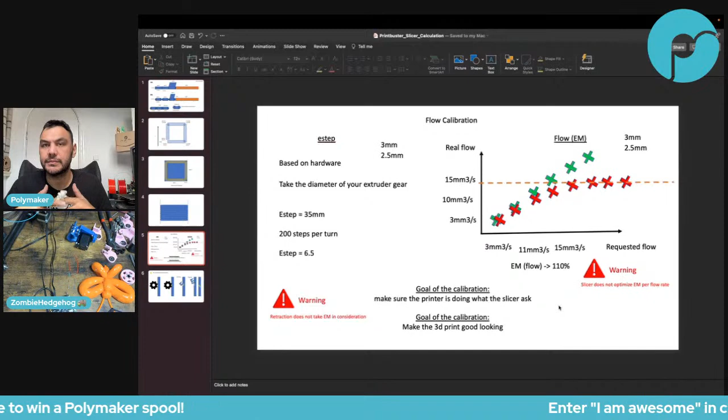I think the best is just the weight, no? Yep, I think so too. Like the actual amount of filament, but the different slicers handle flow differently. So I don't know.

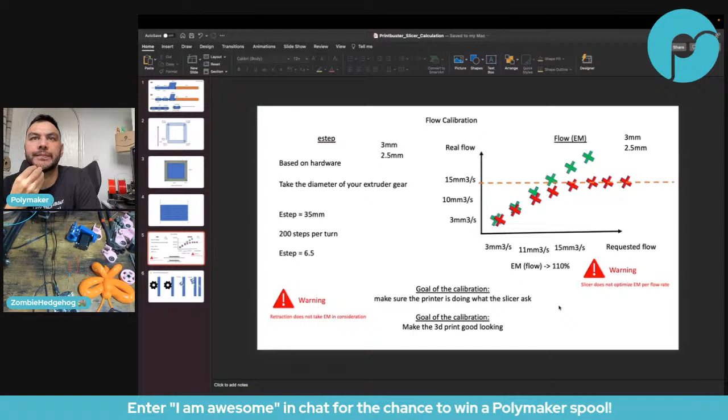Oh, that's right. Okay, so when I was doing some tests, I think that Super Slicer does work properly. So if you request a 0.4 millimeter wall, you'll get a 0.4 millimeter wall, because I did that. I set it to do a 1.2 millimeter vase mode wall, but it only gave me 1.1 millimeters, and I was a little confused.

But then I realized the extrusion multiplier was at 92%. So doing a little bit of math, I think the slicer is probably right. But the reason why we think it over extrudes is because their lines are too squished together or something like that.

I also like calibration via visual inspection. I'm just thinking this is more for a different goal of calibration, just making sure your part looks good. Depending on what you use your printer for, and most of them you use it to create parts that look good, it could make sense to highlight that there's a different goal for calibration. You don't have to make sure your printer is doing what the slicer says, you just have to make sure that what's coming out of the printer looks good. And for that purpose, the calibration process is different.

Yep. So that's kind of why I have the swatch truck, because it does both. It's a visual inspection to some degree, and it's also an accuracy test, like a line width test.

Okay, sorry Zombie, I'll have to stop here, but let's continue that discussion. I think the discussion can shift to what are the factors that affect flow, and how and why. Part of it, we can get some information from Olivier as well, Mirror C. We're going to get some nice information from him, and he's going to do some additional testing outside of only testing the maximum flow, etc. So we'll be able to have some very accurate information from his testing.